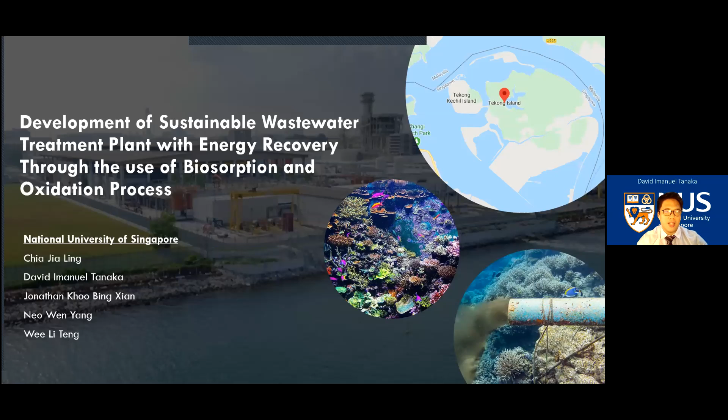Pulau Tekong is Singapore's second largest offshore island with a land area of 24.43 km². It is planned for future developments such as resort and residential areas. However, to prepare the island for future development, it needs to tackle the challenges of treating its wastewater.

Disposal of domestic wastewater effluent is a major problem that causes water pollution in some countries. When domestic wastewater is directly discharged into open water bodies, it may cause negative environmental impacts. Therefore, to tackle the domestic wastewater discharge, the Pulau Tekong Town Council has approached NUS for a proposal for the building of the wastewater treatment plant.

The Pulau Tekong Town Council has given us a limited space area of 0.01 km² to build our proposed wastewater treatment plant. The plant will have a buffer zone of 200 meters away from the residential and resort area.

Based on Singapore's Environment Agency data, the typical wind direction in Pulau Tekong is blowing towards the northeast with a wind speed of 2 meters per second. With this good wind speed and direction, it is a good strategic location where it could prevent odors from the wastewater treatment plant from traveling towards the resort or the residential area.

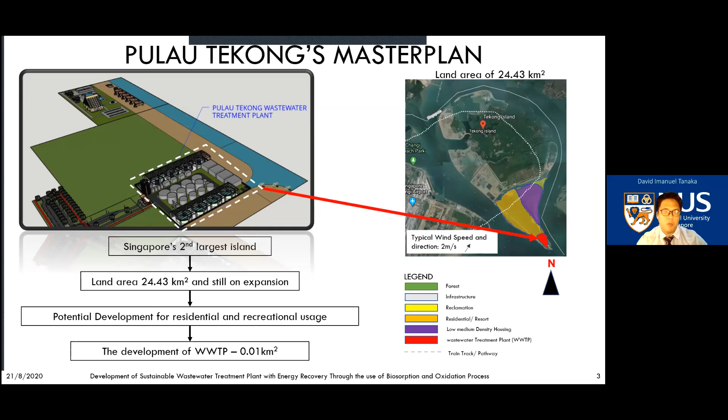The wastewater influent shown here is taken from Singapore's average domestic wastewater discharge from residential areas. Based on the data, the wastewater treatment plant needs to cater for high BOD and nitrogen domestic wastewater. If this untreated discharge water is directly discharged into the sea, it may cause eutrophication to occur.

When eutrophication occurs, it reduces dissolved oxygen in the water source, thus affecting the marine ecosystem and wildlife. It may also cause detrimental health impacts towards the public. As such, to prevent negative environmental impact, untreated domestic wastewater discharge has to be treated to the effluent standards set by Singapore.

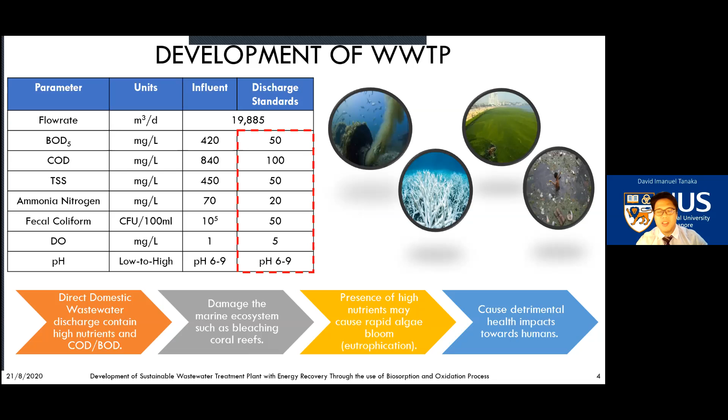Other than meeting the discharge standards, there are a few challenges and criteria we have to meet as well. Due to the proximity of the treatment plant, which is 200 meters away from the resort, and the limited space area of 0.01 km², the team faced the challenge of treating 100% of odor generated from the treatment plant and achieving a solids reduction of 90% to decrease the need for landfill.

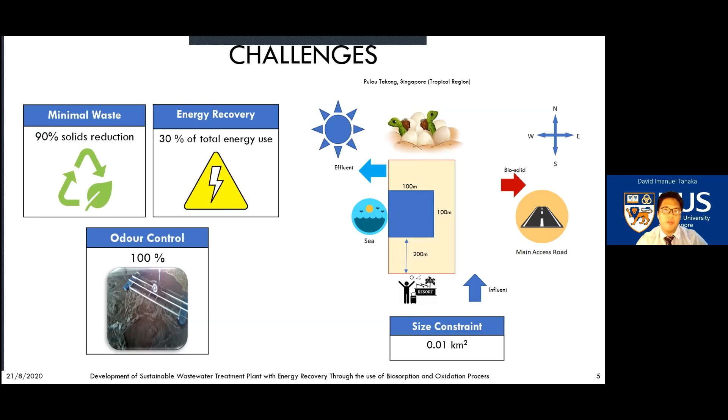In most treatment processes, energy consumption is one of the key factors which increase the operating cost. Therefore, it is important to minimize energy usage by recovering the available energy, such as from biogas, to save on the cost of electricity needed and to promote a lesser carbon footprint as compared to conventional treatment plants.

After considering the challenges faced, the team has come up with a treatment train and design layout which fulfills the requirements set by the Pulau Tekong Town Council.

In our layout consideration, we have categorized the equipment used based on the environmental impacts, which includes environmental risk, vibration, odor, heat, and sound. Equipment with low impact, indicated in green, will be placed around the perimeters of the plant, while high impact equipment, indicated in red, will be placed in the middle of the plant to prevent any disturbance to the public or the environment.

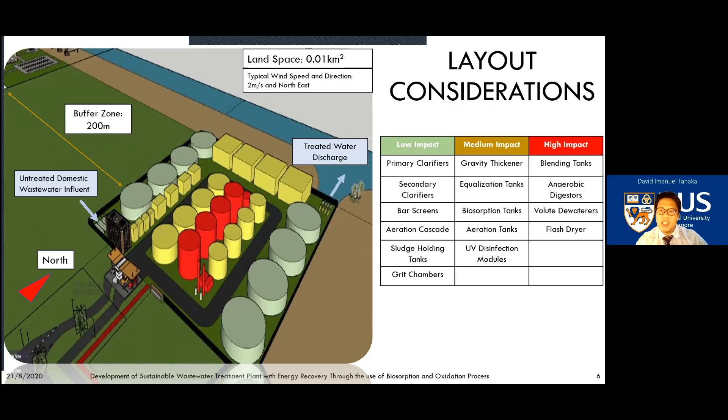Lastly, the medium impact equipment, indicated in yellow, will be placed in between the low and high impact equipment.

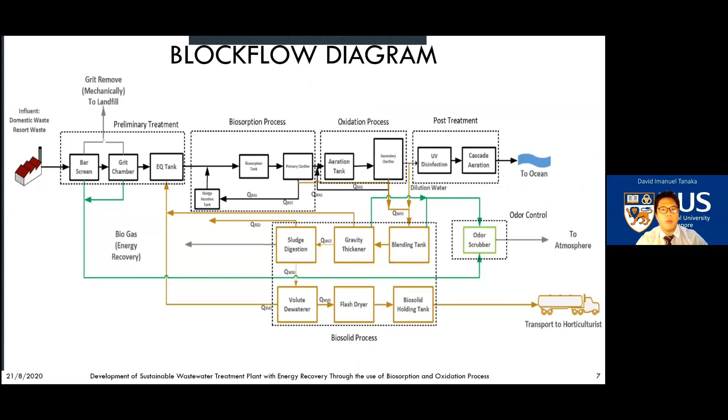The block flow diagram here shows our proposed treatment train, which consists of systems such as biosorption, oxidation, and biosolids. Now, I'll pass the time over to Jonathan, who will talk to you about each process we selected. Jonathan, please. Thank you, David.

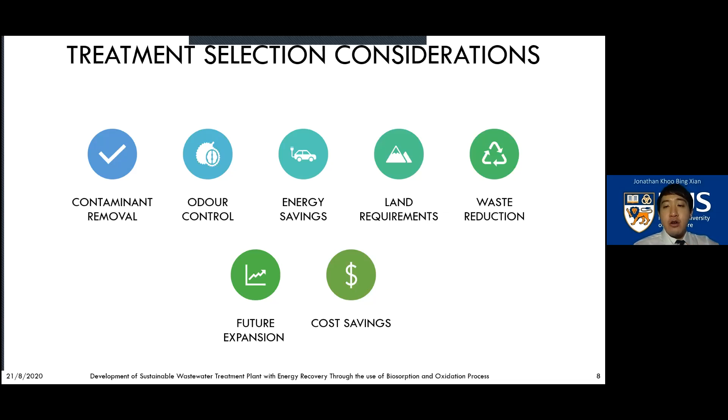Given the additional challenges faced, the treatment processes were not just selected based on how efficient a process is at removing contaminants. We also considered odor control, energy efficiency, footprint, minimal waste production, and the ability for future expansion and cost savings. For preliminary treatment, we chose reciprocating bar screens as they are easy to maintain.

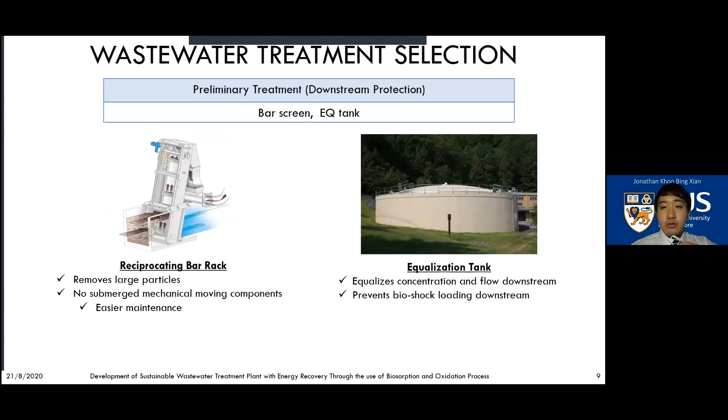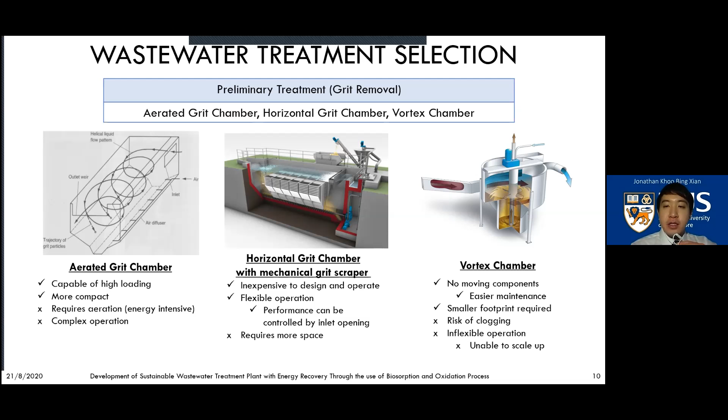We also implemented an equalization tank to ensure equalized flow and contaminant concentration so we can get consistent treatment performance downstream. For grit chambers, although aerated and vortex grit chambers are more compact, aerated requires more energy and vortex has inflexible operational capability. Therefore, horizontal grit chambers were chosen.

For primary treatment, compared to a conventional primary sedimentation tank, biosorption process can produce much more waste sludge through adsorption of organics from the wastewater. The increased sludge production will allow for more biogas to be produced and can help reduce the plant's energy requirement. Utilizing activated sludge can also help significantly reduce organic loading, allowing downstream processes to be sized smaller and have a lower aeration requirement, resulting in much more energy savings. This makes biosorption process much more sustainable than a primary sedimentation tank.

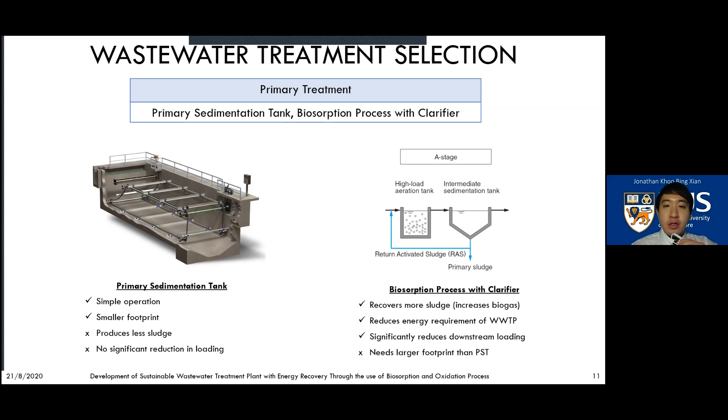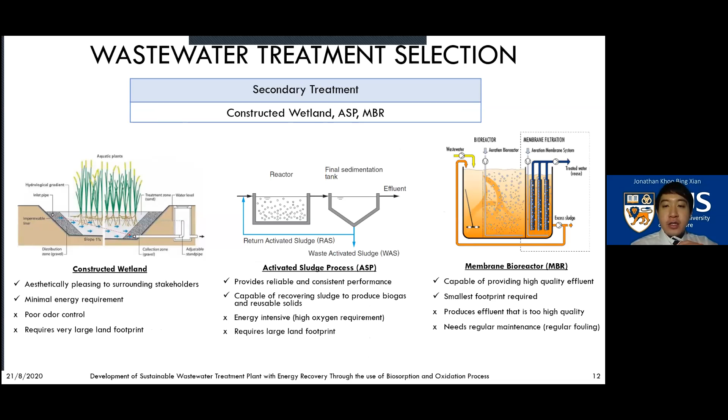For secondary treatment, wetlands are aesthetically pleasing but cannot control odor and need large amounts of space. Membrane bioreactors are compact but costly to maintain. For activated sludge process, although it is known for high energy demands, when coupled with biosorption process, it will require less energy in return. Therefore, activated sludge process was chosen.

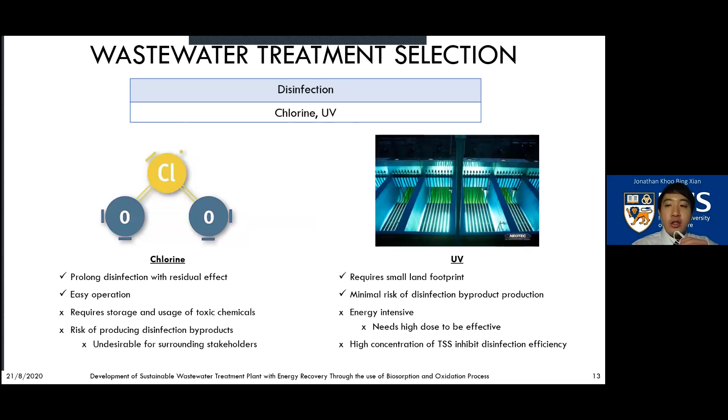For disinfection, UV was ultimately chosen as chlorine disinfection has a much higher risk of producing disinfection byproducts, which could be harmful to aquatic and human life near the discharge area. To meet the requirement at discharge, cascade aeration was also chosen as it requires no energy and is simple to maintain.

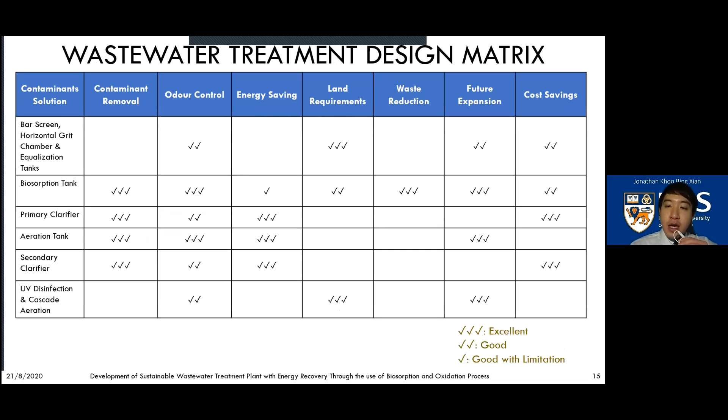Overall, odor control was prioritized in all the processes chosen here, and with biosorption process, we are able to increase cost and energy savings and minimize footprint.

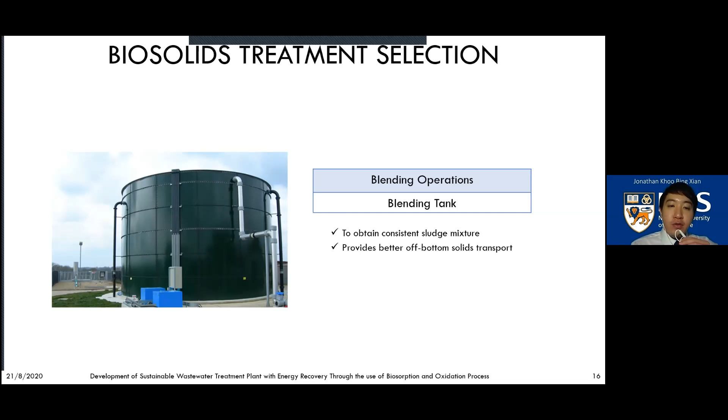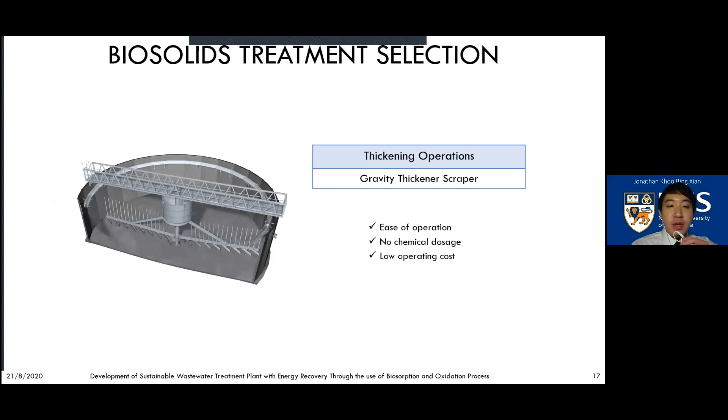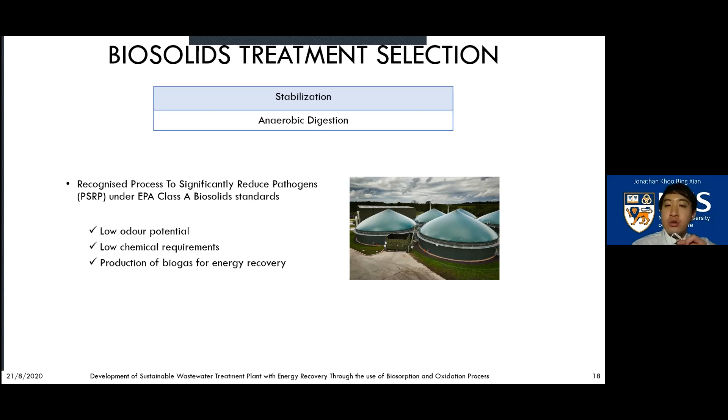After the thickening process, we will also be using the anaerobic digester as it can meet EPA standards for Class A biosolids, and it can also produce biogas for energy recovery. Following that, the Volute multi-disc screw press was used for dewatering because of its low environmental impacts, low energy consumption, operating costs, and land requirements. Furthermore, it can function automatically.

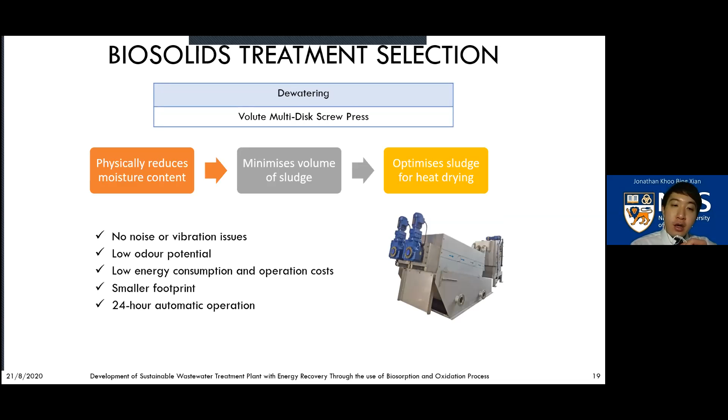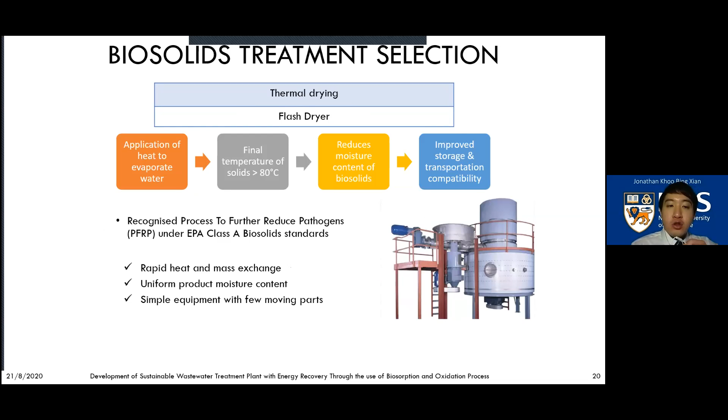Lastly, flash dryer was used as it can also meet EPA's Class A biosolid standards with a minimal footprint. Drying of solids can also make Class A biosolids take up less volume and weight, making storage and transport more convenient. In summary, with all biosolids processes covered in the center of the allocated land, biosolids treatment is effective in odor control, and the matrix also shows the processes having a balance between energy savings and land usage.

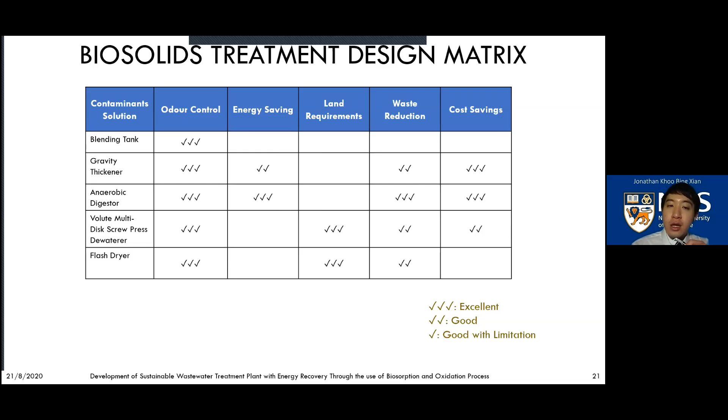Now I'll pass my time over to Wen-Yang who will talk about the treatment specifications.

Thank you, Jonathan. Now let's look at our design for the selected treatment processes. The reciprocating bar screens were designed to remove up to 30% of grit. Subsequently, horizontal grit chambers were designed to be capable of removing up to 95% of the remaining grit in the wastewater. The flow will then be equalized in the EQ tank, designed to be 13.4 meters in diameter and 5 meters in depth.

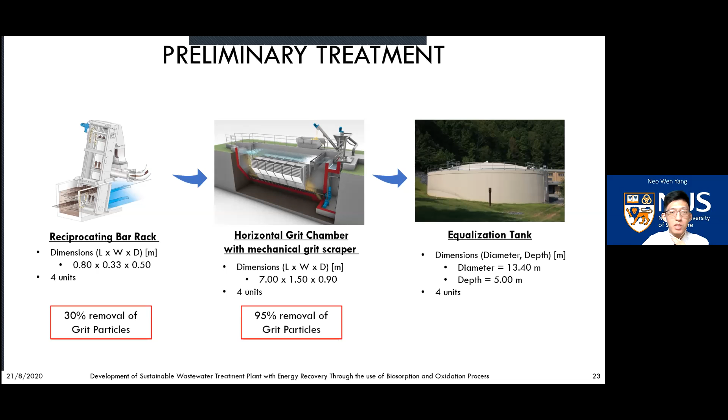Next, we'll move on to the biosorption stage. How biosorption works is that the biosorption tank serves as a mixing tank, which mainly removes COD from wastewater through the use of activated sludge as the biosorbent to rapidly absorb and store organic matter on the active site. Absorbed sludge will be aided by secreted EPS from the activated sludge.

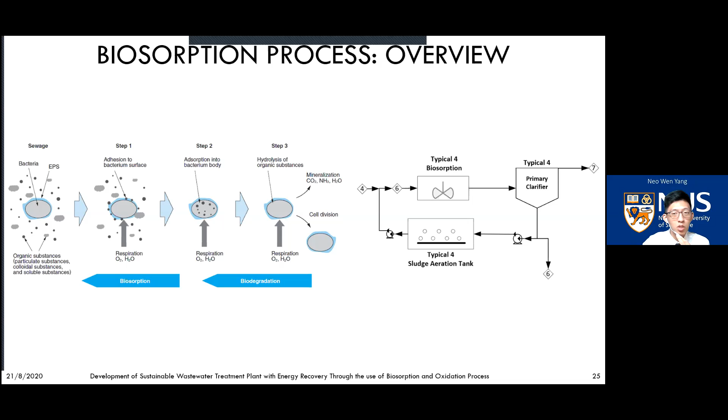The absorbed sludge is then settled in the primary clarifier to be recycled back for use in the biosorption tank. To ensure that the biosorption process continuously works, the RAS is aerated to oxidize excess absorbed organics to free up the sludge absorption site.

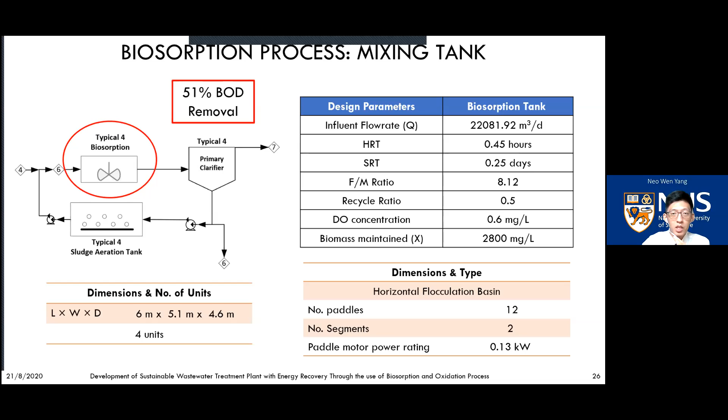In the biosorption tank, a short HRT of 27 minutes and a DO concentration of just 0.6 mg per liter was used to prevent excess oxidation of organics and allow the predominant removal method of organics to be biosorption. With an SRT of 0.25 days and biomass maintained at 2800 mg per liter, the design tank was calculated to have an F/M ratio within the typical range of 2 to 10, and was capable of removing up to 51% of the influent BOD.

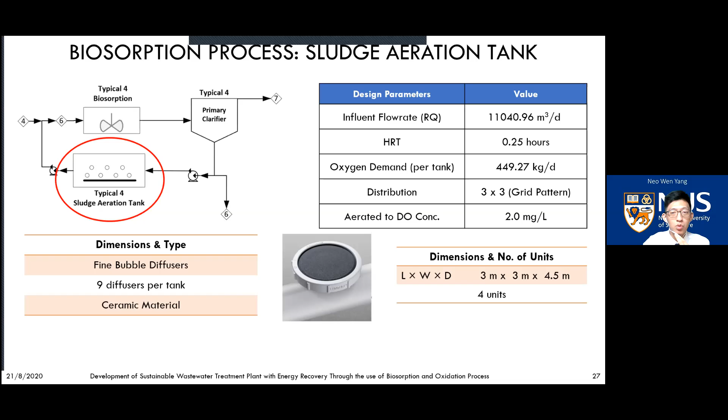To reactivate the adsorption site of the recycled sludge, the sludge aeration tank was designed to have an HRT of 15 minutes, and the sludge will be re-aerated to a DO concentration of 2 mg per liter using 9 diffusers. Lastly, to maintain 2800 mg per liter of biomass in the biosorption tank, the clarifier was designed to be 17.7 meters in diameter with a 4.4 meter depth, and it will have an HRT of 2.34 hours and is capable of removing up to 79% of TSS from the biosorption tank effluent.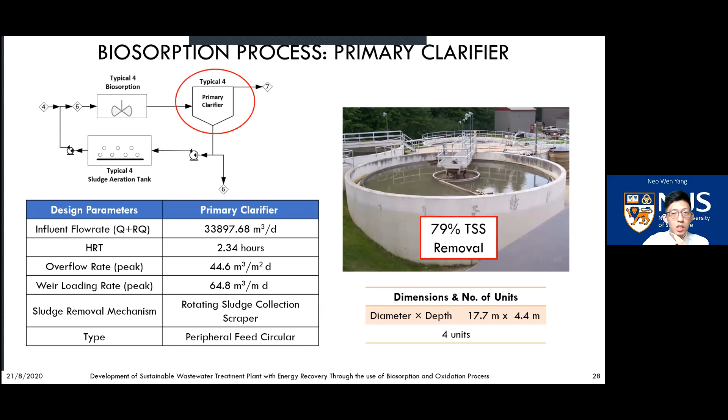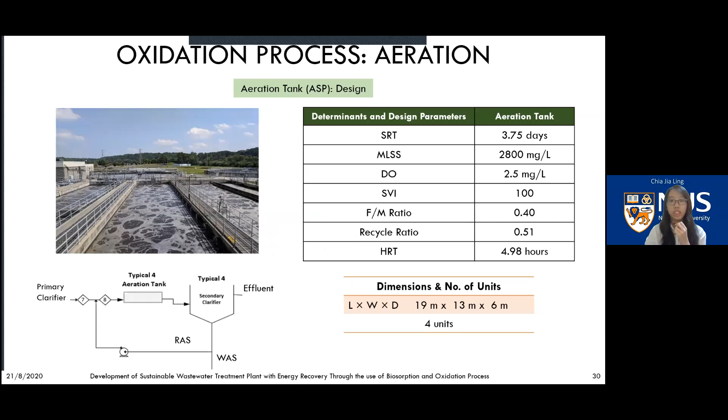So moving on, for the ASP, the first part will be the aeration tank, with each tank having dimensions of 19 by 13 by 6 meters, with a total of 4 units. Based on the SRT of 3.75 days and the MLSS concentration of 2800 milligrams per liter, we obtain an HRT of 4.98 hours, and 51% of the flow will be recycled back from the FST.

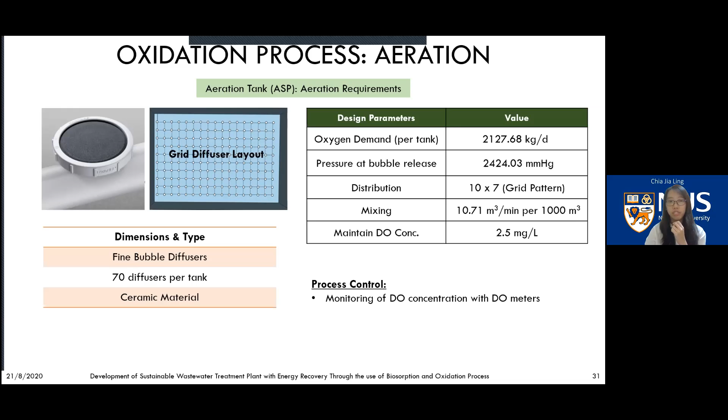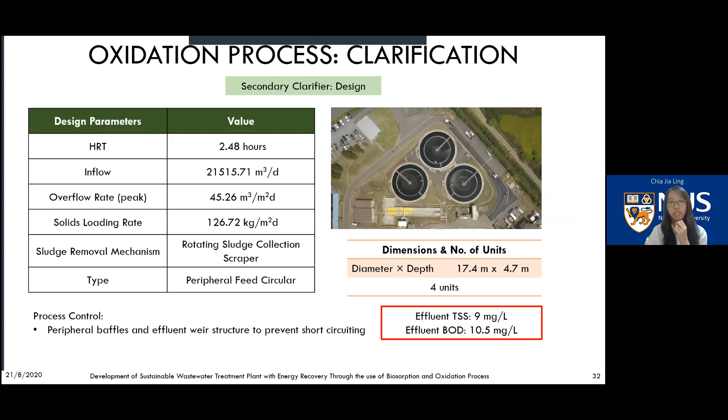For the aeration requirements, we have selected a fine bubble diffused air aeration system due to its ability for simultaneous mixing and its ability to fulfill high oxygen demands. We will require 70 diffusers in each tank, and this system will help us maintain a DO concentration of 2.5 milligrams per liter. Moving on to the clarification process, we will use 4 circular clarifiers with a peak overflow rate of 45.26 meter cube per meter squared per day. This allows for 2.48 hours of retention time, which is sufficient for good solid-liquid separation.

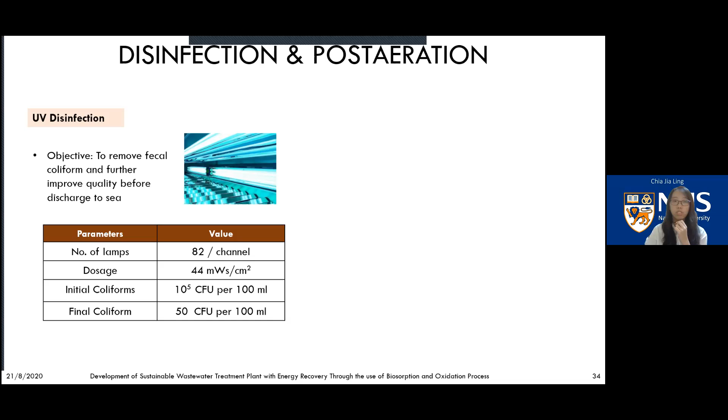Moving on to disinfection and post-aeration, firstly we have UV disinfection. We designed it based on a dosage of 44 milliwatt seconds per cm squared, allowing us to achieve a final coliform concentration of 50 CFU per 100 milliliters. To meet the discharge standards of 5 milligrams per liter for DO, the cascade aerators were designed to have 6 steps with 1.2 meters in height.

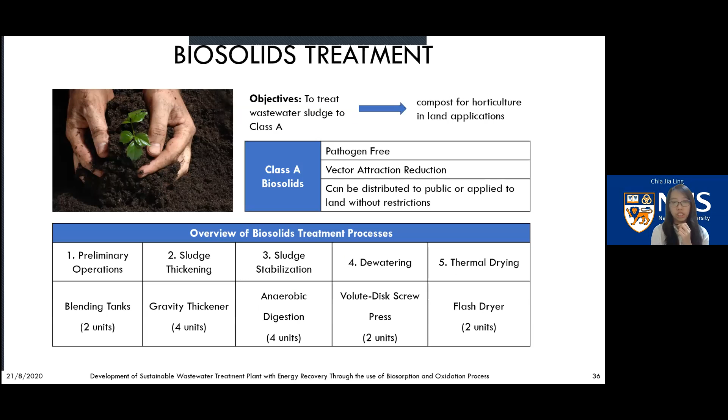Moving on to biosolids treatment, the main objective is to achieve good sludge quality so they can be used as fertilizers for agricultural purposes. So the sludge should be treated to Class A, where they will be pathogen-free, resistant to vector attraction, and can be applied to land without any restrictions.

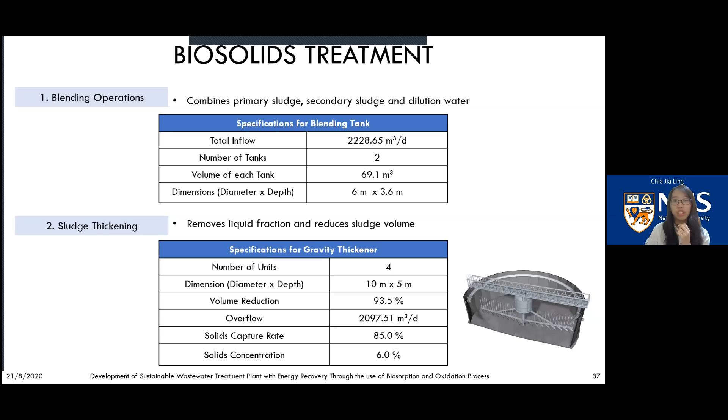So for the processes, firstly we have blending tanks. There will be 2 units each, which are 6 meters in diameter and 3.6 meters in depth. Gravity thickeners, 4 units, are used where they are 10 meters in diameter and 5 meters deep. These will be capable of achieving 93.5% volume reduction for sludge.

Moving on, to produce Class A biosolids, 4 units of digesters are used. They are operating at 35 degrees Celsius and an SRT of 15 days. They will be able to achieve a VSS reduction rate of 52%. With this design, 2800 meter cube per day of biogas can be produced, which renders to 2 million kilowatt hours per year, and this translates to about 30% of energy savings annually.

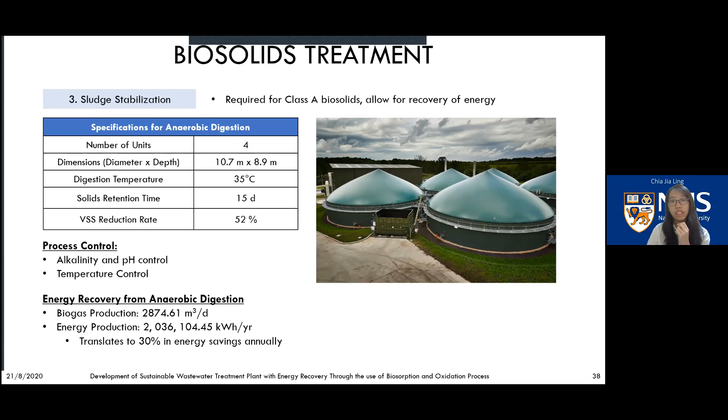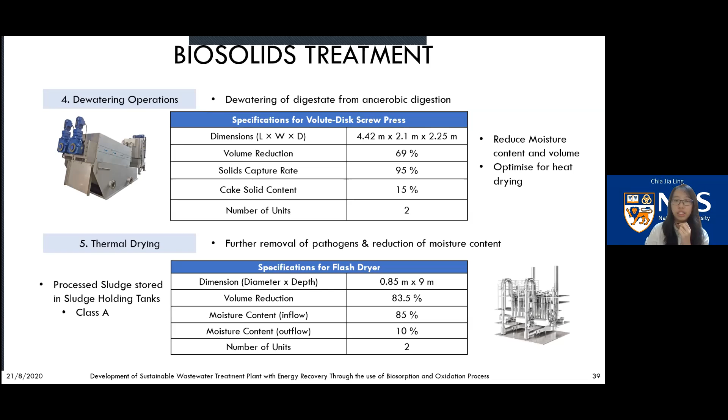So the wastewater from anaerobic digestion, dewatering, and thermal drying operations will be sent back to the plant for treatment, while the processed sludge will be stored in sludge holding tanks. Subsequently, the sludge will then be used as fertilizers as they are treated to Class A biosolids.

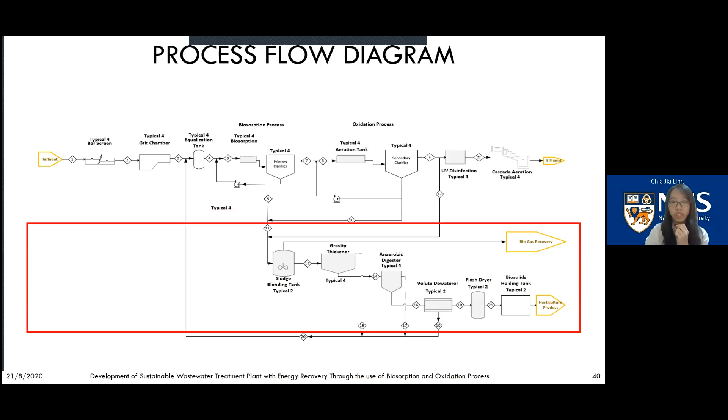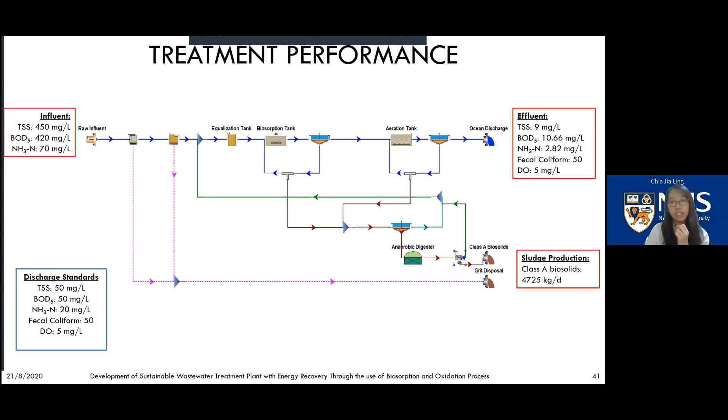Now I pass my time to Li Teng to discuss our odor control measures, costs, and environmental assessments. In our odor control system, we'll focus on hydrogen sulfide and ammonia gas, as these are odor producing and could affect the public, wildlife, and workers in the treatment facility.

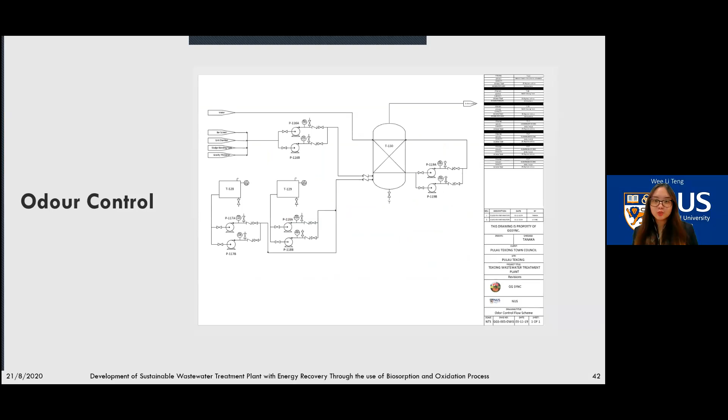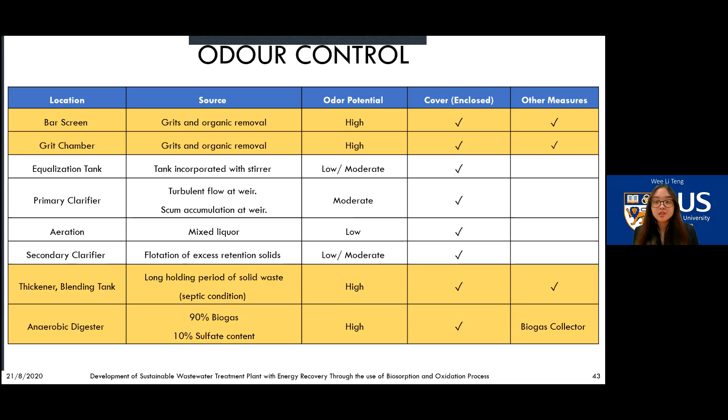As seen from the table, most of the treatment processes produce odor, thus they will be enclosed with a cover. We've further identified various treatments that require extra odor control, such as bar screens, the grit chamber, and biosolids processing. As such, a wet scrubber will be used to control odor. The anaerobic digester does not go through odor control, as it will capture the biogas to generate electricity.

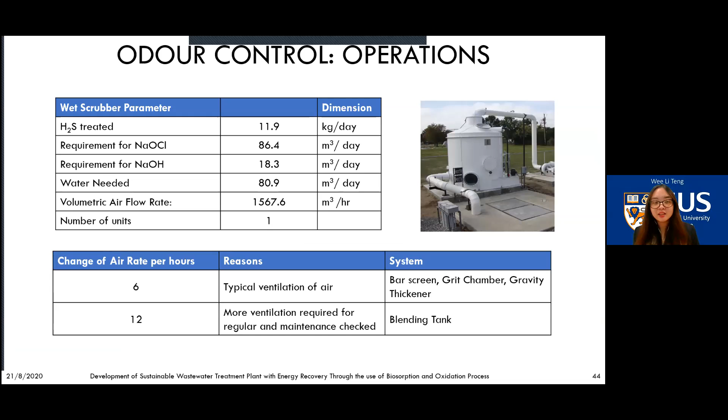Here are the operational parameters for odor control. The wet scrubber uses sodium hypochlorite to oxidize the sulfides captured, and sodium hydroxide is used to convert hydrogen sulfide to sodium sulfide. With that, the system is able to treat 11.9 kilograms per day of hydrogen sulfide.

Next, for the OPEX of our treatment facility, we analyzed electricity, chemicals, disposal, and labor, and an estimate of $1.8 million is needed. However, with the utilization of biogas, we are able to achieve our target of 30% energy savings, and approximately $290,000 is saved, which brings the OPEX to around $1.5 million annually.

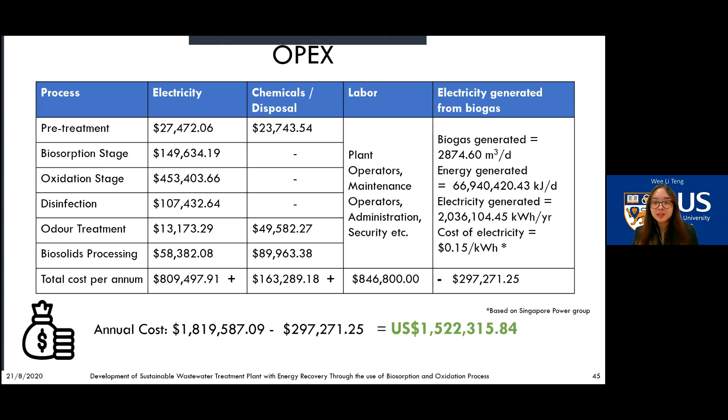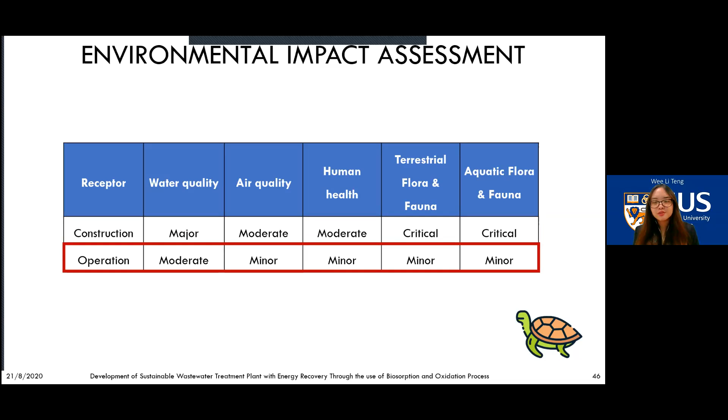Next, when the plant is fully operational, the receptors are generally at a minor region. This is because water quality will be greatly improved and the likelihood of pollution will be reduced. With heat-producing equipment strategically placed in the middle of the plant, away from residents and flora and fauna, we'll minimize impacts on them.

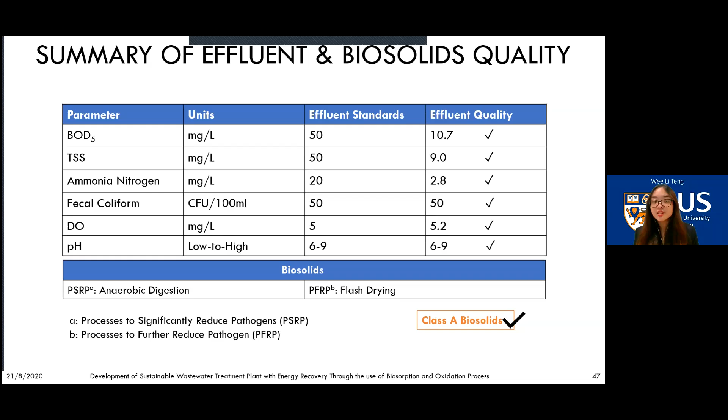In conclusion, our facility has a maximum treatment capacity of 19,000 cubic meters per day, and we're able to obtain a TSS removal of 98%, BOD removal of 97.5%, ammonia nitrogen removal of 96%, and a three-log removal of fecal coliform. With these percentage reductions, the effluent will meet the stringent discharge standards.

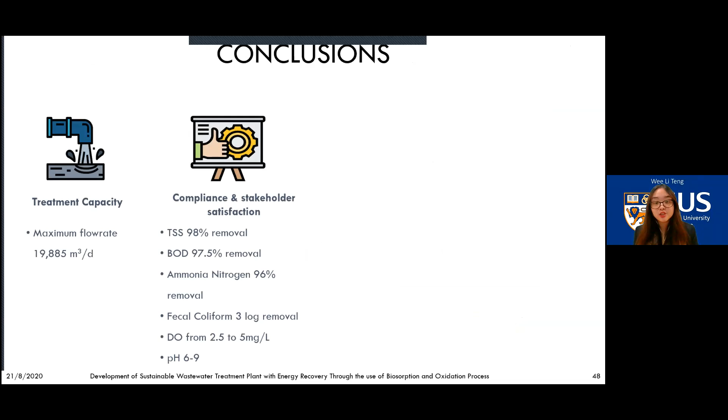In addition, the plant is environmentally sustainable as the treated Class A biosolids will be reused by horticulturalists as fertilizers, which helps us reach our zero waste goal. Mitigating measures will be put in place to ensure that humans and flora and fauna will not be affected during the construction and operational phases of the facility.

So the odor generated from the facility will be treated, ensuring the air quality in the area will not be affected. The energy recovered from the biogas will be used in the plant. As such, the plant is economically sustainable as the biogas is able to provide savings of $297,000, thus we've achieved our goal of energy savings of 30%.

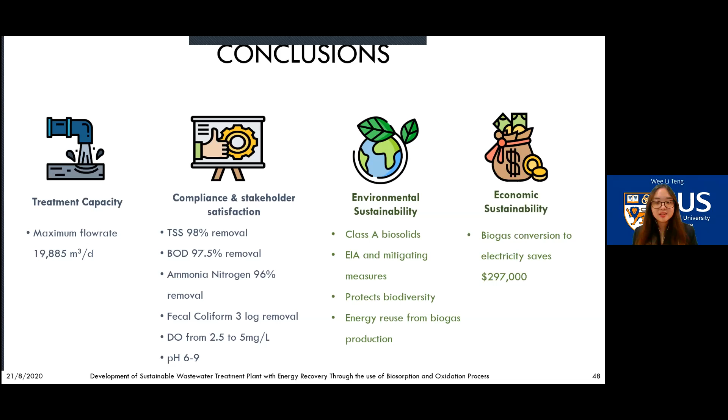So all in all, our treatment facility using biosorption and oxidation process is able to meet stringent discharge standards and is economically and environmentally sustainable.